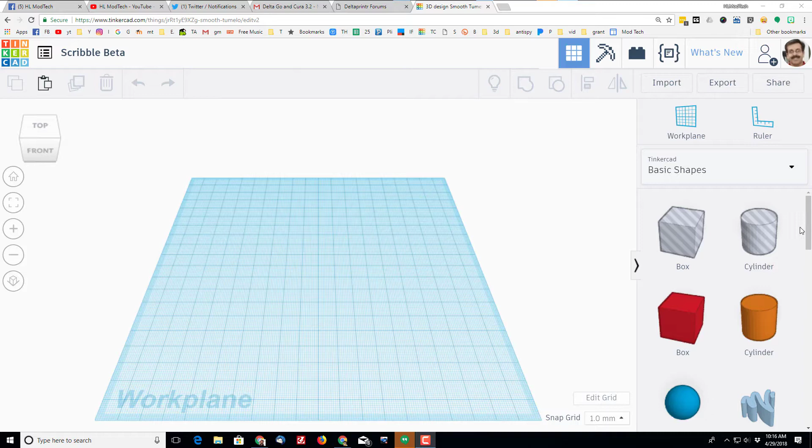When you slide down the list, you will find the Scribble Beta on the right. When you drag it out, it gives you a new window to tinker with. It has a brush, an eraser, a shape tool, and a shape eraser.

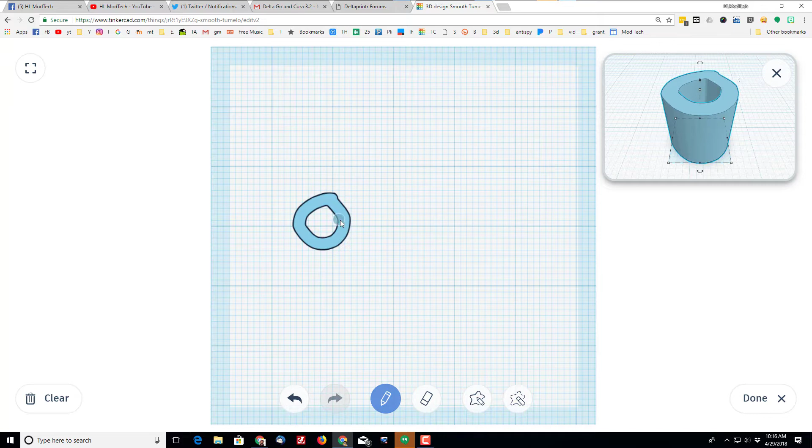I'm going to start with the simple brush tool, and since I'm a big Lions fan, I'll make the word One Pride, which is the Lions hashtag that's pretty popular, just by drawing it on the screen, connecting it like it's cursive. There's my N, there's my E, and now my pride. It's really fun and intuitive.

You can tell I am not an artist, but it still turns out pretty doggone slick. There's the top of my i. You'll notice my E is missing, so I'm going to extend it a little, and make the other half of the E a bit better.

Now I'm going to go to the eraser tool and zoom in. I'm going to cut out that hole, cut out that hole, and cut out the D. You can double cut to make it look different, and you've got undo if you don't like what you did.

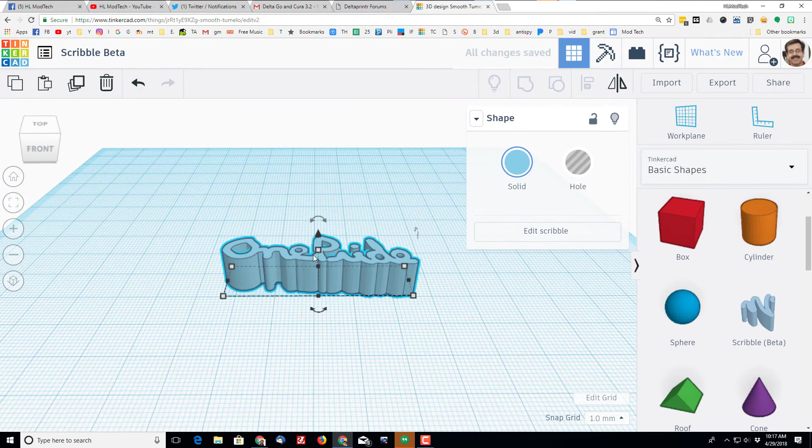It's really slick how quickly you can make something that you think is cool. When you're done, simply click done, and you have got One Pride, or whatever you've chosen to build, instantly available. I'm going to turn this into a keychain.

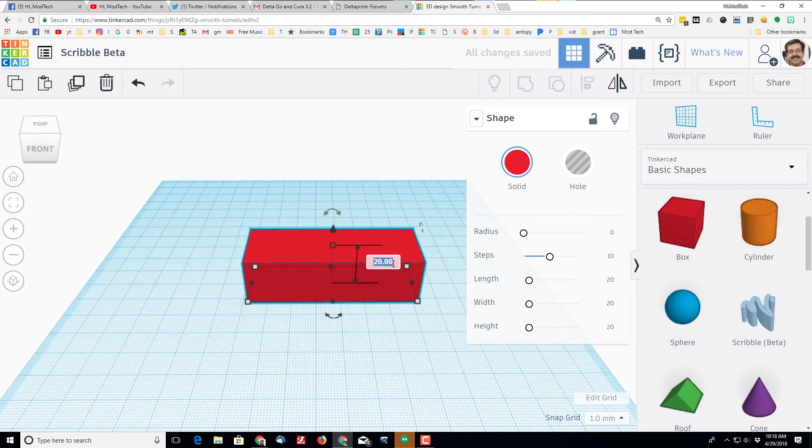I'm going to switch to a more lion-like color of blue, and then for my keychains, I always bring out a box. I click the corners and like to make mine 70 by 25 millimeters, and then make them 2 millimeters thick. I'm going to use the awesome height tool so I can grab my One Pride.

I'm going to raise it up 2 millimeters. Notice it shows me there 2 millimeters. I'm going to show all again.

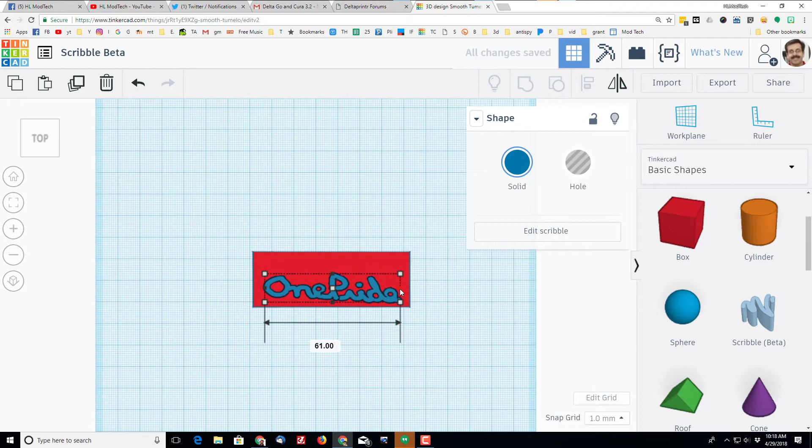Now when I go to the combo top, or just the top view, I can move my One Pride where I want. I can use the black handles to stretch it so that it fits. I'm going to switch back to that combo top front view.

Scroll in a little bit. I'm going to drag that a little further to the right, and this to the right, and now I'm going to add my hole. Need to make this a lion's color as well—I cannot look at red.

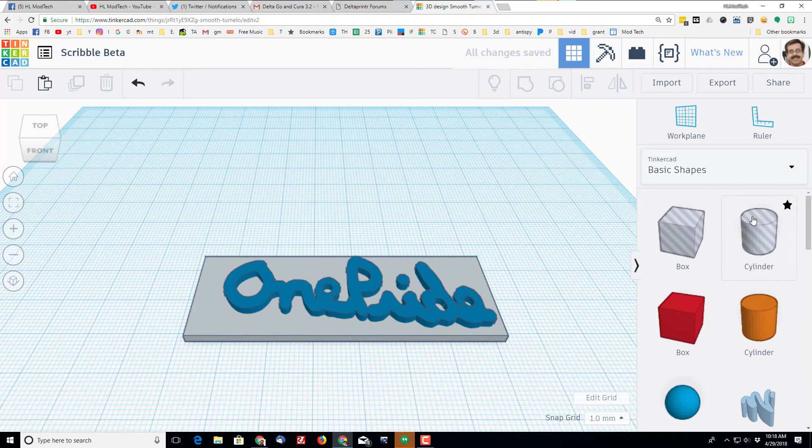That's so much better. And then I'm going to grab the cylinder hole. Another one of my favorite tricks is holding shift and dragging a corner. I like to make my holes 5 millimeters, then simply use the arrow keys to nudge it into place. Switch to the fit view to selection and top view to make sure there's enough room around each side.

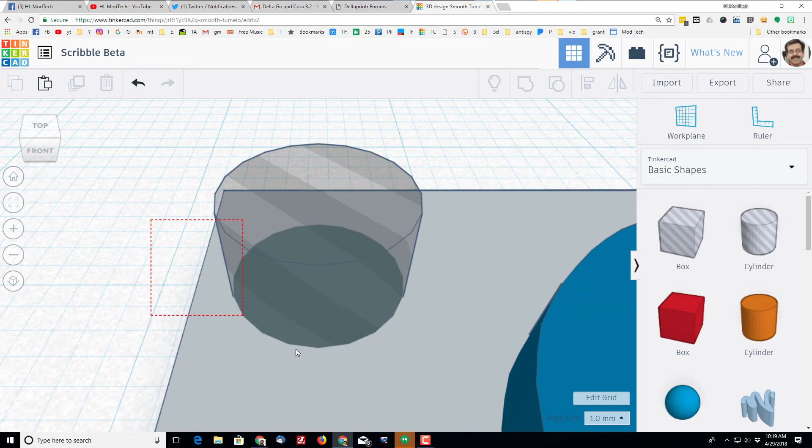I'm going to go back to that combo view and grab both those parts and group them to cut out the keychain hole. I'm going to click on the keychain and fit that view to selection.

Notice now it's all one color, which is how most people are going to print it, but I like to turn on multicolor so I can see it in all its Detroit Lions awesomeness.

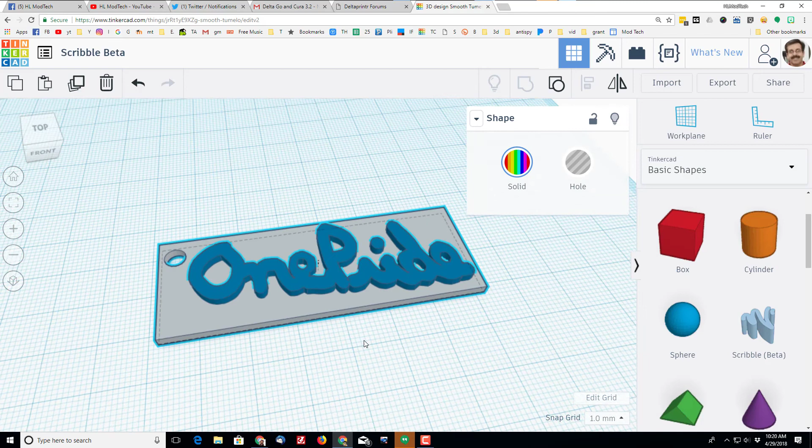So there you have it. That is the epic new Scribble Beta. I think it is going to be amazing. If you put it in the hands of somebody that really has artistic skills, you are going to see some incredible creations. I hope you've enjoyed this.